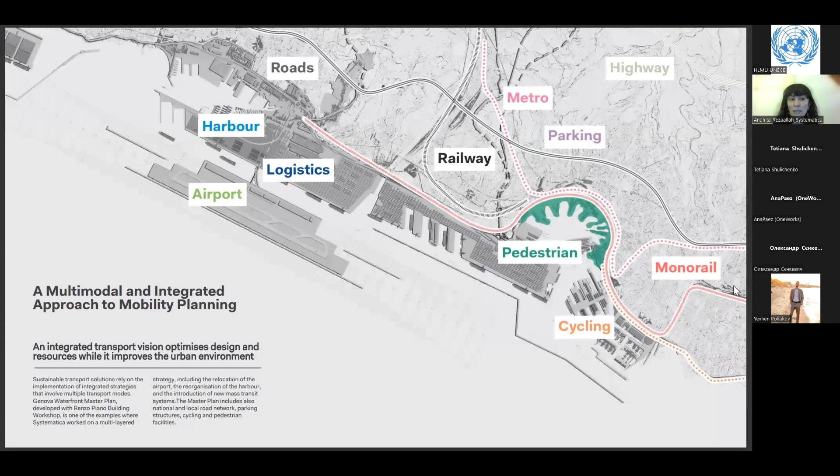So if this is the first time you're joining the meeting, we are Systematica, a transportation planning and mobility engineering studio based in Milan. We have over 35 years of experience working on projects of different scales, from national and regional to urban mobility plans, mixed use master plans, and complex buildings around the globe. Our strategies are always multimodal and integrated mobility approach.

In addition, we have a non-profit research foundation that works closely with us in most of our projects, and especially for the Mykolaiv Master Plan project, that it's called Transform Transport Foundation.

So jumping to the studies we've done, during the capacity building workshop that we did a couple of weeks ago, we showed a bit of opportunities and challenges that we believe the city of Mykolaiv is facing for different aspects of transport and mobility. Here, I would like to show again in detail studies that we have done, starting from the wide area analysis, going into understanding the city characteristics, morphology,

and mobility behaviors, the main mobility hubs of the city, followed by in-depth analysis of different aspects of mobility in the city of Mykolaiv. I will show briefly the methodology that we discussed in the other meeting with you for selecting 6 cities as benchmarking cities that we will look into, and the type of studies that we are planning to do, both qualitative and quantitative for these cities, followed by our first studies for port accessibility strategies that these cities are implementing to improve the vehicular traffic in the city and deviate the traffic from the city center, which we believe is one of the aspects that concerns the city of Mykolaiv as well.

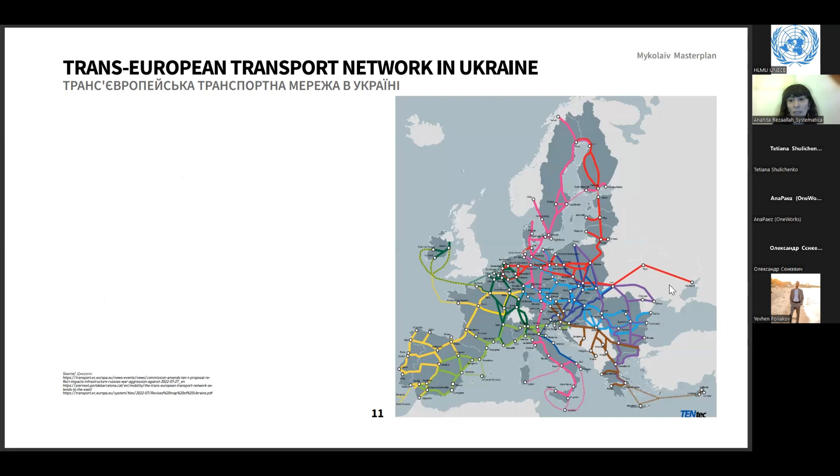So for the wide area analysis, we looked into very briefly policies and strategies that the EU is planning to implement regarding extension of European transport networks towards Ukraine and also the city of Mykolaiv. We looked into improvements in rail, road and water transport, and defining core and comprehensive port, airport and rail network of the country.

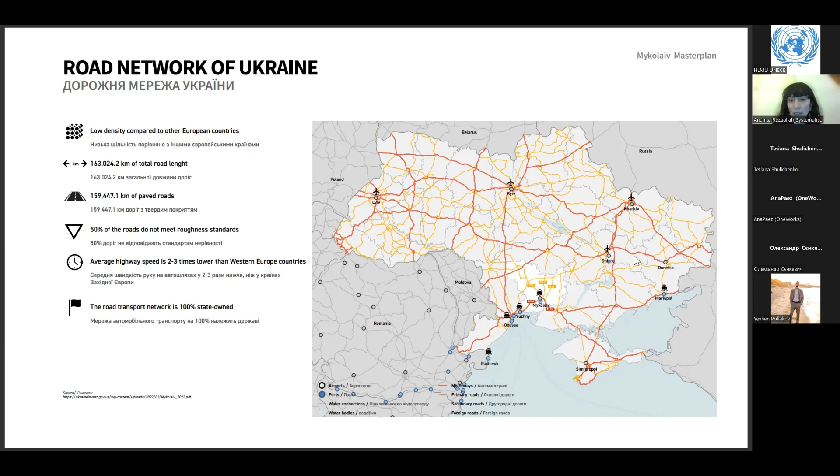Then we looked into the road network of Ukraine that is quite extensive. However, in terms of quality, 50% of the road doesn't meet the required standards, and the average highway speeds are 2 or 3 times lower than Western European countries. The city of Mykolaiv is well connected with the rest of the country through these extensive networks of highways and primary roads.

We looked into the national railway network of Ukraine. We know that Ukraine has one of the most extensive railway networks in Europe. It's 24,000 kilometers of rail, and 48% is electrified, and it serves 18 ports of the country, including the port of Mykolaiv.

We know that there are 13 commercial ports in Ukraine, 12 sea terminals, and 4 main seaports that Mykolaiv is one of them. They are handling 78% of the freight and cargo handling of the country. More than 85% of grains are handled in these 4 major ports, and more than 95% of metal products are as well handled through these ports, including the port of Mykolaiv. So the port is a quite important hub for the city and country's industry.

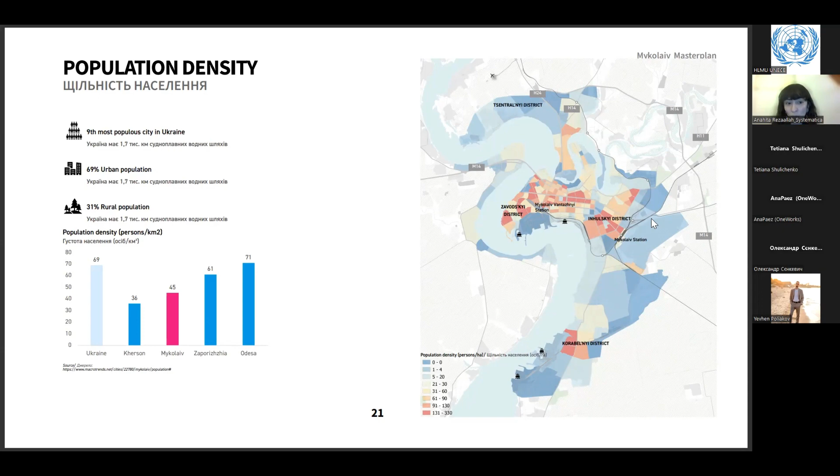Looking at the available socioeconomic data, we know that there are 11 universities in Mykolaiv, making it a quite important city for education and young people. We know that there are over 500,000 workforce available in the city of Mykolaiv, while the unemployment rate before the war was almost 11.5%.

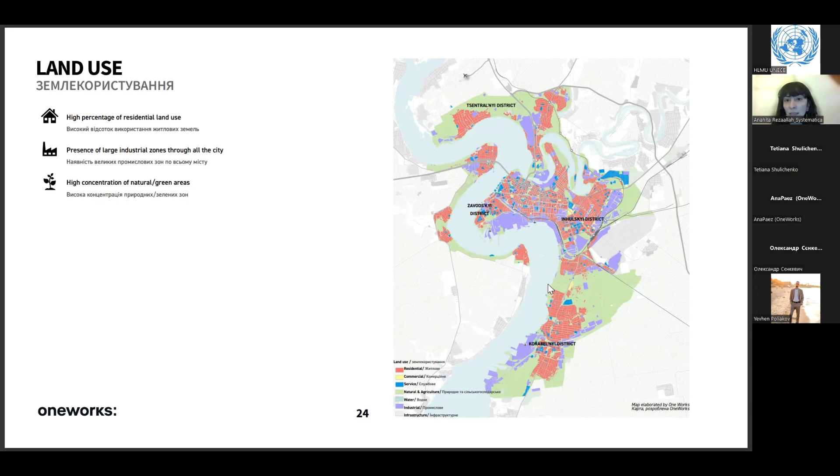We looked at the land uses of the city to understand that there is a high percentage of residential areas in the city, while the city, especially close to the river, has a heavy presence of industrial zones that limit access to the riverfront for the population. There is a high concentration of natural green areas that can be considered a potential for the city and citizens.

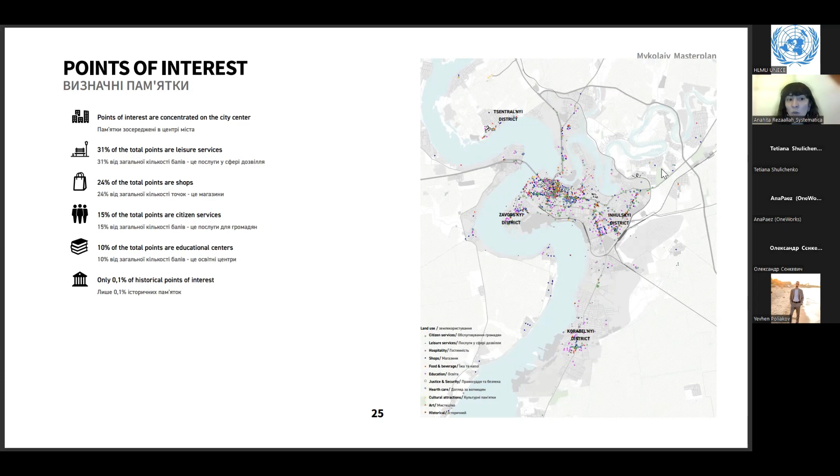We looked at the points of interest and their density within the city of Mykolaiv. We know that 31% of these points of interest are leisure services. They are mainly concentrated in the city center area, and moving out from the city towards the suburbs, they decrease in number drastically. There is a heavy presence of educational centers in the city, so 10% of the total points of interest are educational centers, and 0.1% are historical areas.

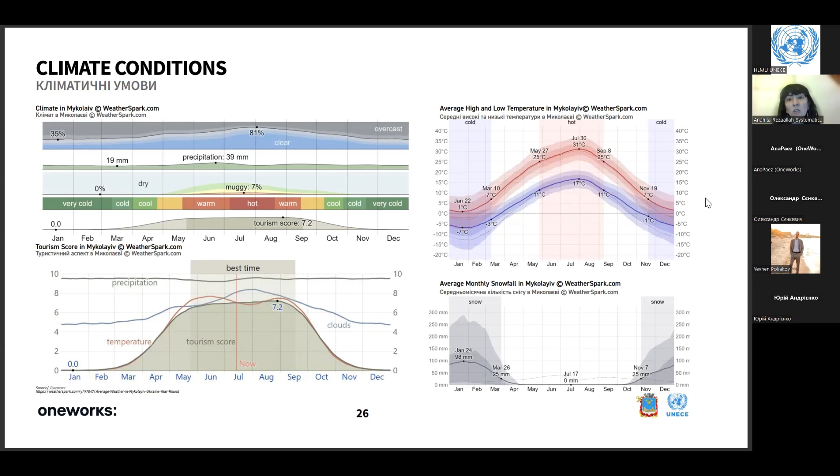We took a closer look at the climate conditions of the city to understand that during the winter months it gets quite cold, with the presence of snow. These are aspects we have to consider while defining strategies for pedestrians and cycling. For the rest of the seasons, especially during the summer, the temperature is quite agreeable for activities such as cycling and walking. We looked at the city elevation and slope maps to understand that most of the city center and areas where residents are located are quite flat and suitable for cycling.

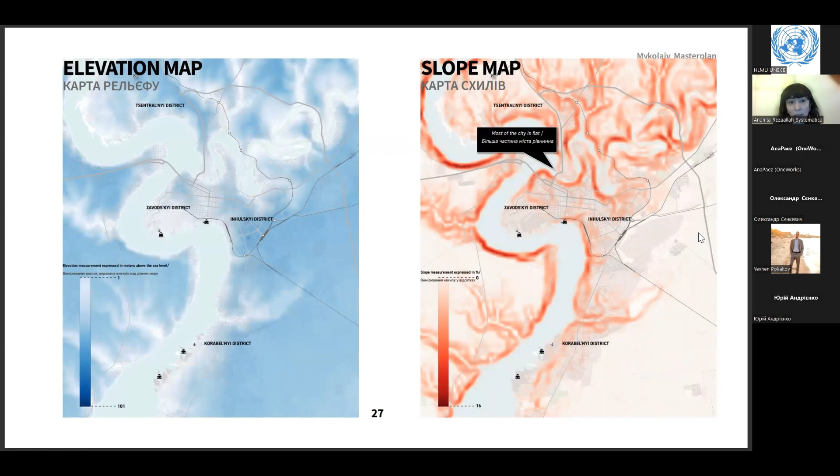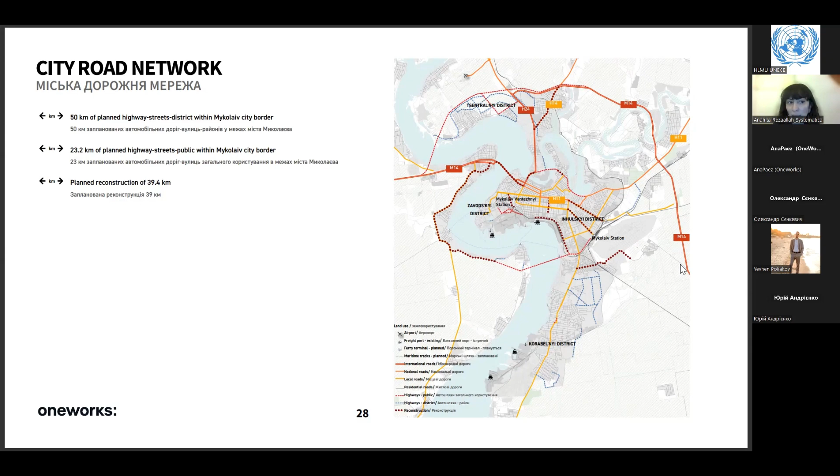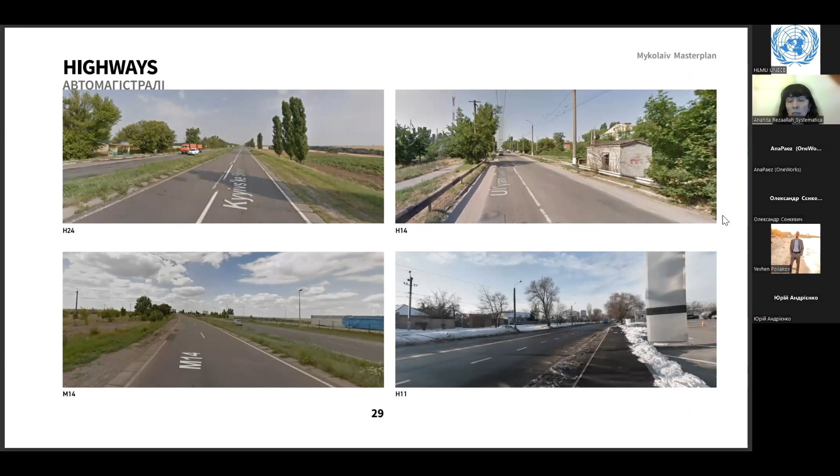We looked at the city road network and all the plans we could find from previous studies done by the municipality to extend this network, and in some cases propose new bridges to improve connectivity through the port area. I'm going to show you more in detail the studies we've done in this regard. So these are a few images of the conditions of the highway roads that connect Mykolaiv to the rest of Ukraine.

So we looked at the port of Mykolaiv and the facilities that it has. We know that the port area includes almost 70 hectares in area, and is located mainly in two areas close to the city center in the north and further south.

We know that the main roads and highways that connect the port to the rest of Ukraine for freight are passing through the city center, and this causes lots of concerns regarding congestion, air pollution, and traffic safety for citizens.

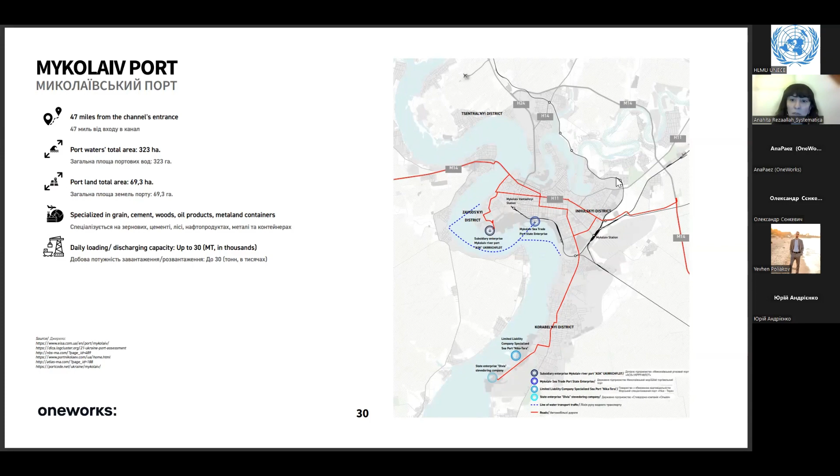So we studied more in detail access to the port area from different main locations in the city, from Kiev, to understand the roads that would be mainly used by trucks for connecting Kiev to the port of Mykolaiv, from Kherson and from Odessa.

So again, as I mentioned, we are fully aware of the issue of these main roads passing through the city center of Mykolaiv.

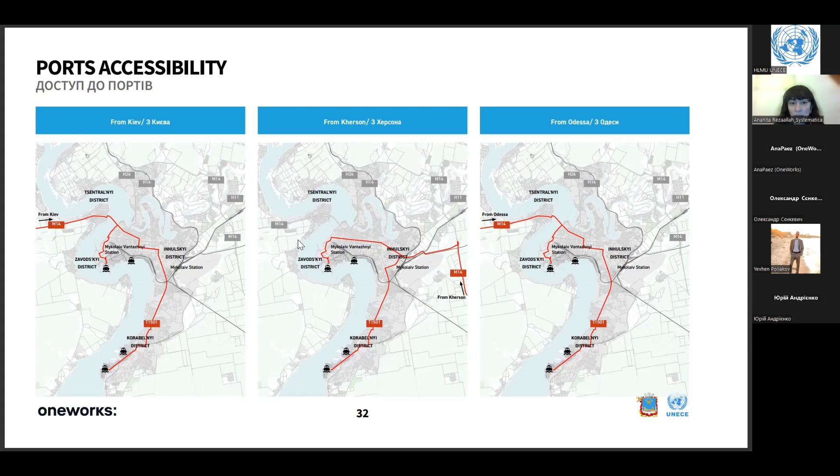We took a closer look at the Mykolaiv International Airport. We know that unfortunately the airport is currently damaged by the war. However, we know from previous statistics that the airport could handle up to 22,700 passengers per year. The airport is quite close to the city center.

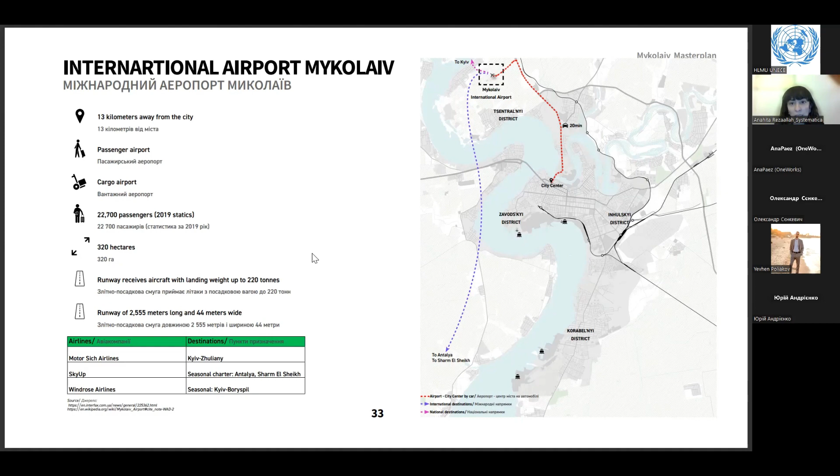So we took a closer look at the railway network of the city, which is quite extensive and reaches both port areas, located closer to the city center and towards the south, closer to the sea. And we know that the railway network handles both passenger and freight.

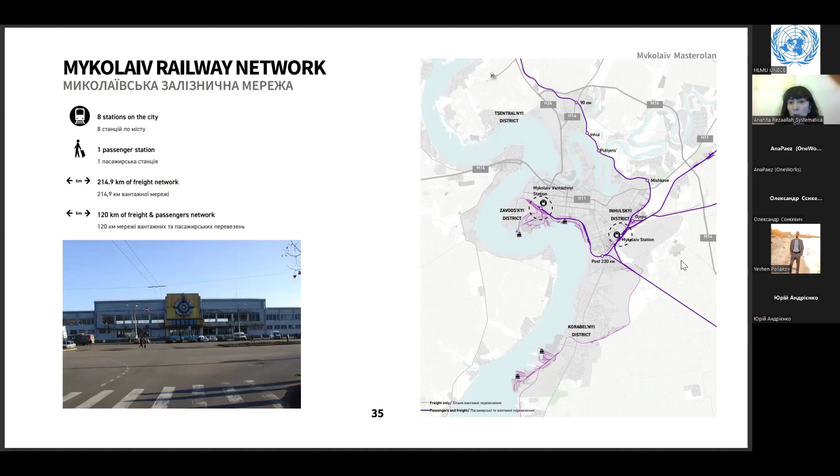There are several stops that we have identified. However, we know that some of these stations might be disused stations at the moment.

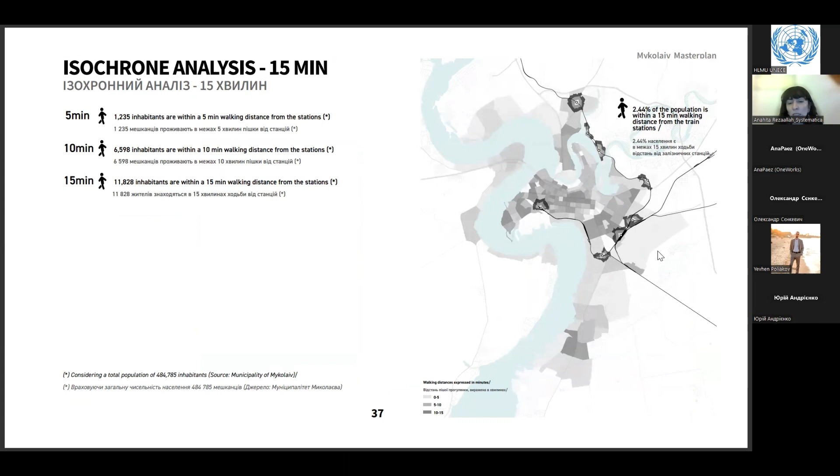Doing isochrone analysis for accessibility to these railway stations, we could understand that 2.5% of the population lives in the proximity, 15 minutes by walk, of the railway stations.

So from the Sustainable Urban Mobility Plan studies that was done previously by the municipality, we took a closer look at the mobility behaviors and patterns in the city of Mykolaiv, especially the modal share.

We know that public transport is used in 49% of the movements. However, walking is also another important component for mobility. In Mykolaiv, 40% of the modal share is dedicated to walking. Cycling is very limited due to lack of infrastructure.

And we are aware that part of this modal share dedicated to public transport is because of the marshrutka, as a sort of additional mode to the public transport.

We know that men are more likely to use cars and women are more likely to travel by foot. We know that women are uncomfortable using cycling due to the lack of infrastructure, similar to the trend that is available in the rest of the world.

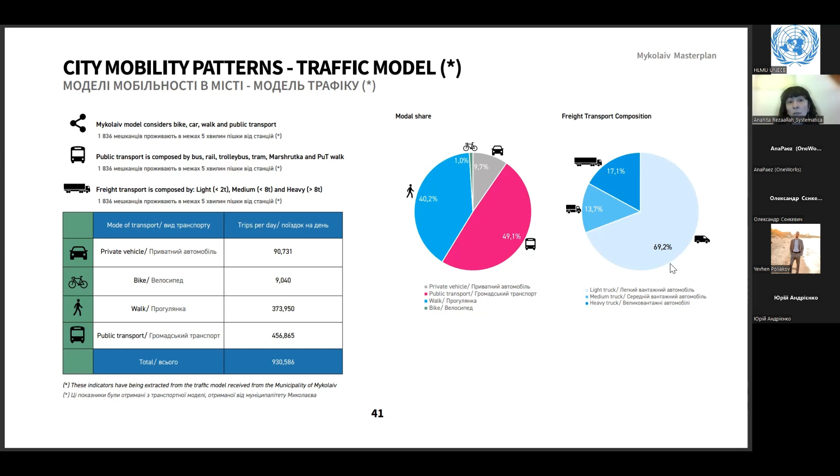So we know that heavy trucks are responsible for 17% of the freight traffic, medium trucks almost 14%, and lighter trucks are responsible for 70% of the freight traffic in the city.

So going back to the road network of the city, we know that at the moment there is no traffic limited zone or policies to regulate or limit the traffic within the city, especially for heavy vehicles.

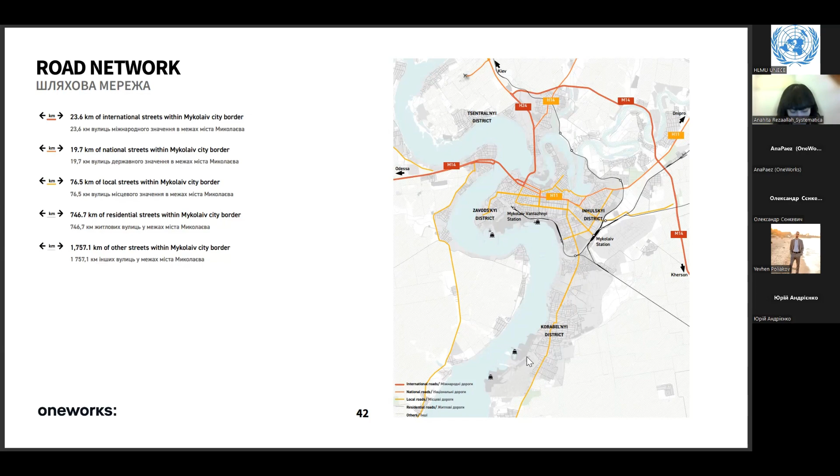We know that the main local roads, shown in yellow here, are the ones used by this heavy traffic, connecting the rest of the country to the port of Mykolaiv.

We tried to have a closer look at different typologies of roads to identify the pros and cons for each of them. I'm not going to go through everything, but I will just show a few examples.

In case of international roads, there is wide greenery available, and the ample space dedicated to vehicular lanes is an opportunity for reduction of lane space to dedicate to micromobility and cycling lanes. However, these wide lanes allow for high speed. Around these types of roads, there are no active ground floors to encourage walking or cycling, no cycling infrastructure available, no drop-off areas, and there is always a safety concern for pedestrians.

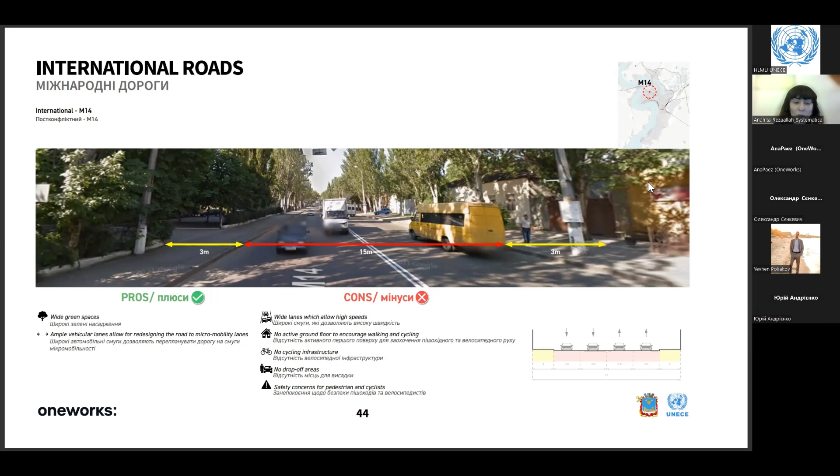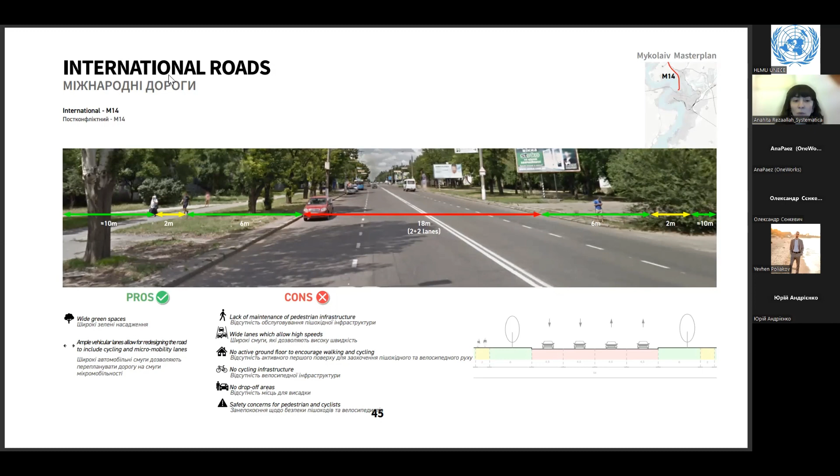This is another example, the M14 road that we looked into - the same pros and cons apply.

In case of national roads passing through the city center, most of the roads have greenery that can work as a buffer for safety for pedestrians and cyclists, and ensure climate comfort for walking and cycling.

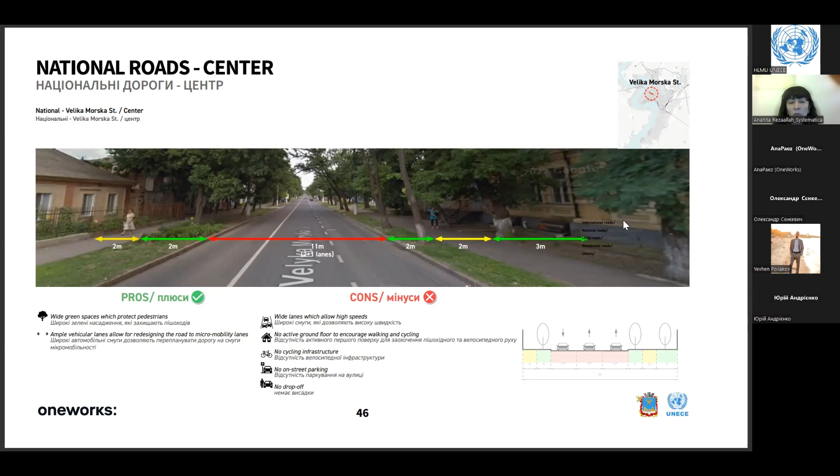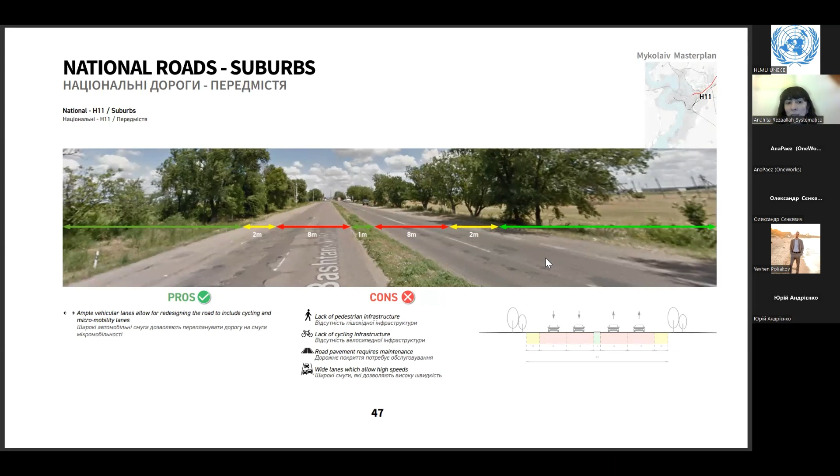However, these vehicular lanes are quite wide, allowing for high speed, with no active ground floor, no cycling infrastructure, no street parking, and no dedicated drop-off. All of this causes concerns for pedestrians and cyclists. In case of suburbs, there is no area dedicated to pedestrians or cyclists, and in some areas the road pavements require maintenance.

Going into local roads, there is the presence of a green buffer and availability of space, especially by deducting from the vehicular road to provide infrastructure for cyclists.

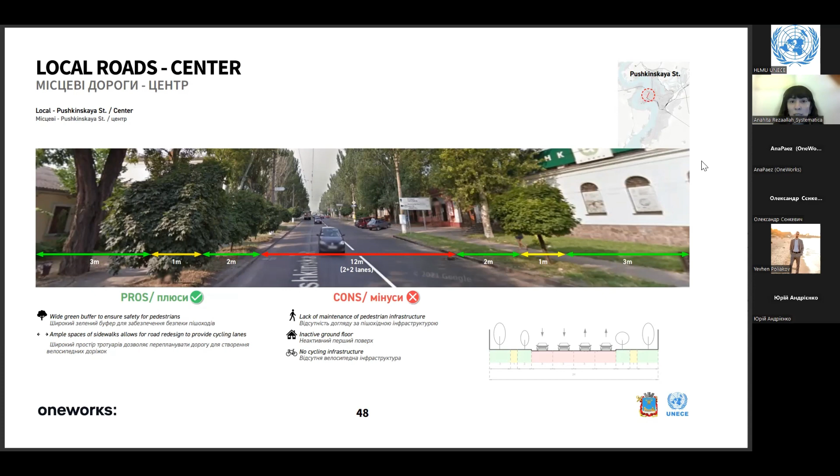In some places, the pedestrian infrastructure and sidewalks require maintenance. Again, there is a lack of active ground floor, which we believe would be a main component encouraging people to walk and cycle within the city.

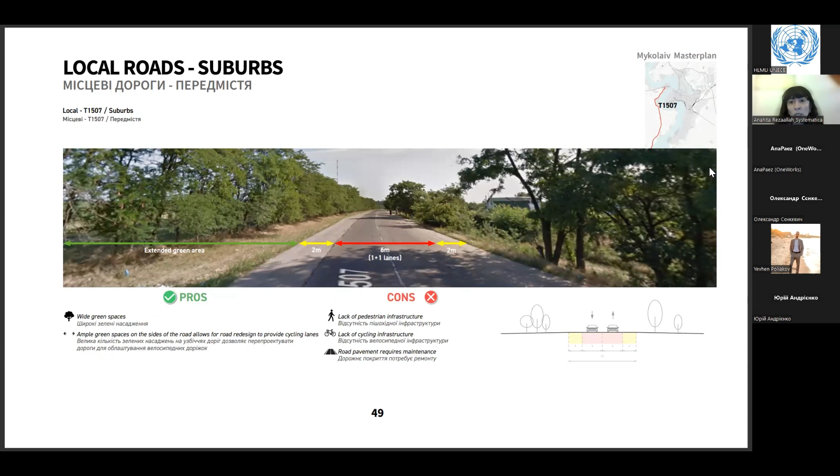Similar to the national roads, the local ones in the suburb area again lack any kind of infrastructure for pedestrians or cyclists, and there would be main safety issues for them.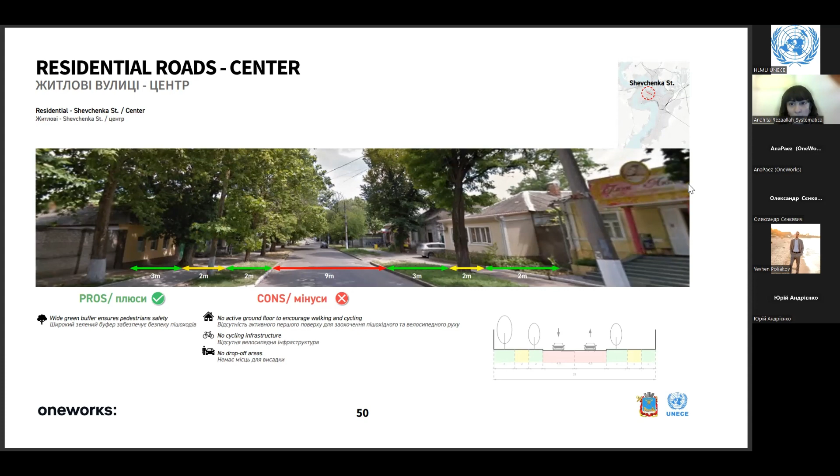Residential roads, again, there is no active ground floor, no cycling lanes, and no dedicated drop-off areas. However, we have the presence of greenery, safety buffers, and the possibility of adding cycling infrastructure to these road typologies around the city.

In the suburb, however, low traffic streets allow for shared spaces, but in some areas the lack of clearly defined pedestrian infrastructure might cause safety issues for pedestrians. The road might require maintenance in some areas of the city, and there's always the lack of active ground floor.

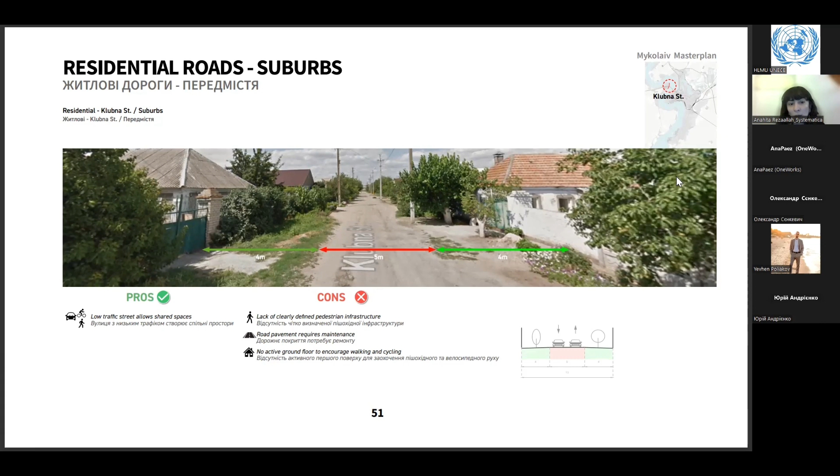Then we took a closer look at the Central Avenue, as we believe it's one of the main streets within the city center that has traffic safety concerns, with a lot of heavy vehicle traffic passing through to connect to the port.

There are no speed limits, so there are concerns for safety. There are no dedicated drop-off areas for pedestrians or cyclists, no cycling infrastructure, and no active ground floor to encourage walking and cycling.

However, there is a wide green space in the central area that allows for road redesign to provide dedicated lanes for cycling and micromobility. In general, the central location of the Central Avenue in the city makes it a suitable area to provide active ground floor in the future.

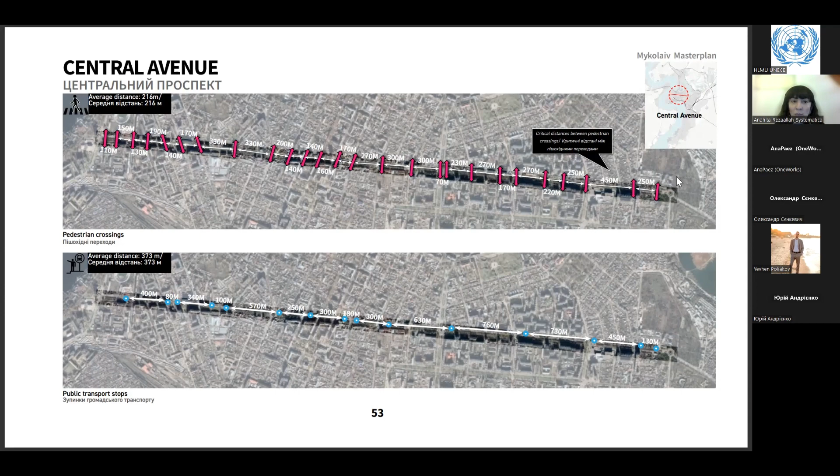We took a closer look at how frequently there are crossing points or junctions and public transport stops. Every 216 meters there is a crossing point, and the average distance for public transport stops is 370 meters. Both make this road a suitable area for walking and cycling and active ground floor activities. However, the concerns regarding heavy vehicle traffic and no speed limits should be taken into account.

So very quickly, there are several challenges for the road network: lack of bypass to divert traffic from the city center, especially heavy traffic; bridges in unsatisfactory conditions; a high number of traffic accidents; excessive width of lanes allowing for high speed; no traffic limited zones or speed limits within the city; and a lack of cycling infrastructure and active ground floor to encourage the shift towards more sustainable modes of transport.

The opportunity is that the city is not car oriented, with only 15% of the modal share for private car. The city has a strategic location in the road network of southern Ukraine, and there are bridges planned to connect the city to these highways and divert heavy vehicle traffic from the city center.

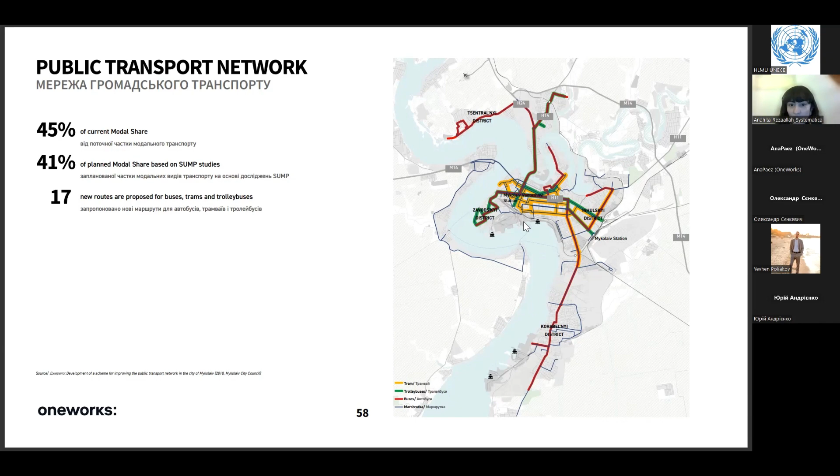However, looking closely at the network density, we can identify areas within the city, marked by number 1, that are underserved by public transport. There are industrial areas that, even though there is a heavy presence of employees, are still very underserved, with basically no public transport access provided.

On the west side of the city, far from the center, the marshrutka is the only available mode of public transport. The central part has the most overlap of modes and routes of public transport, while in suburban areas this decreases drastically.

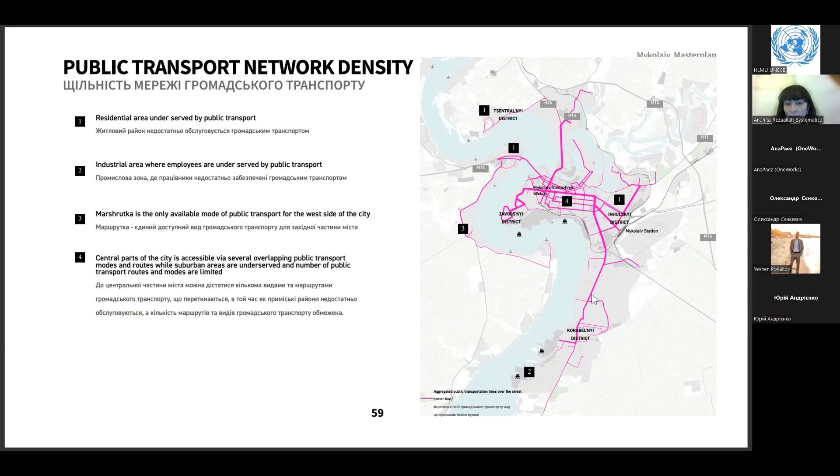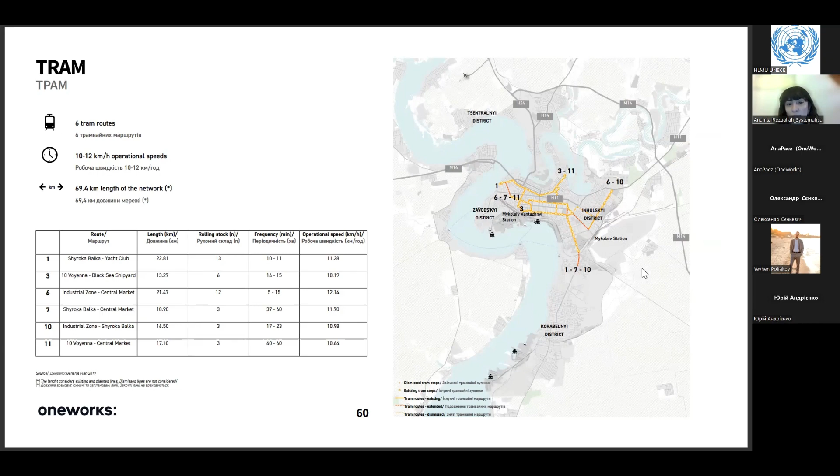We took a closer look at different modes of transport. Looking at the tram, we know there are 6 routes available, the operational speed is low, and the tram is mainly concentrated in the city center. This low operation speed and frequency decreases tram use by citizens.

Looking at the tram infrastructure, the condition of the rolling stock and infrastructure needs improvement. The stops lack travel information that would encourage use of the tram, such as timelines, timetables, maps, and similar details.

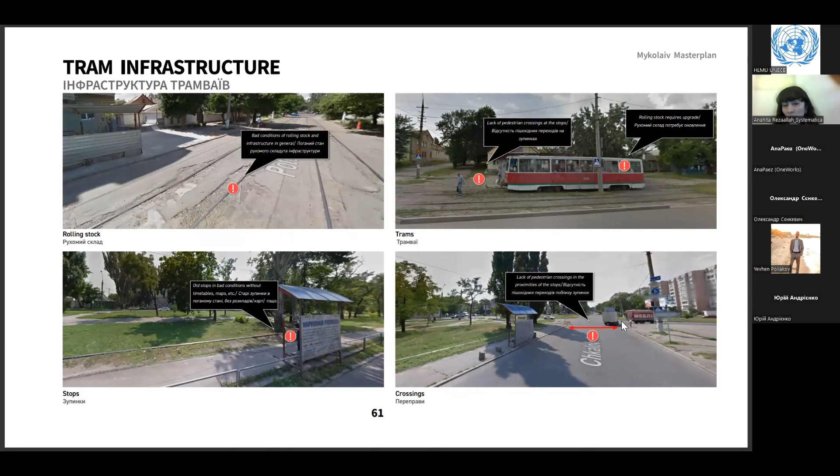There is also a lack of pedestrian crossings at tram stops in several locations, causing safety concerns for pedestrians, as you can see in these 2 images.

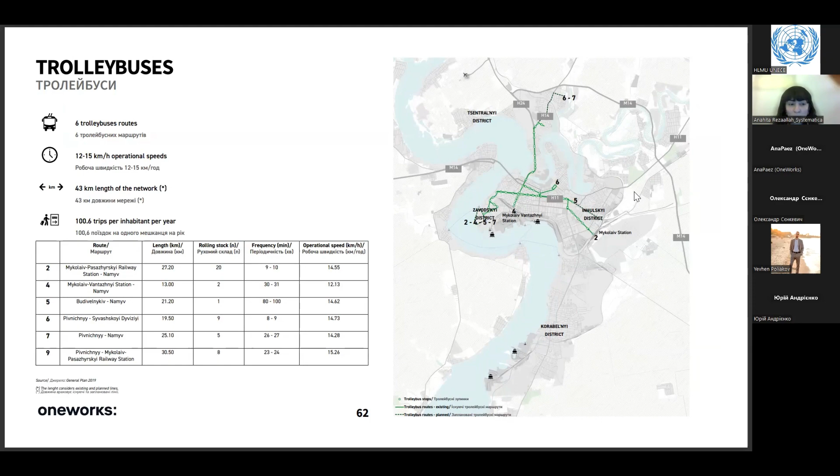Then we look at the trolley buses. Similar to the tram, the trolley bus mainly connects the central part of the city, and toward the south and west there are no lines or routes available.

Looking at the infrastructure, some stops don't have shelter, maps, or timetables, and the ones that do have shelter still lack maps and timetables that would encourage and facilitate use for citizens.

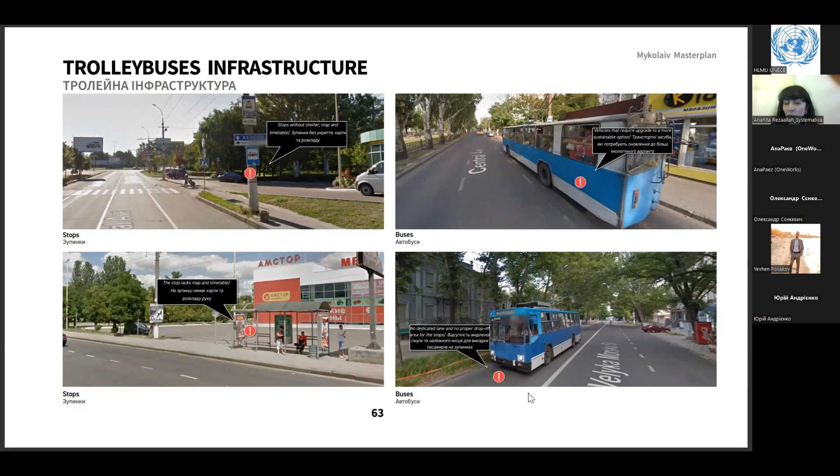We know vehicles need to be upgraded and the rolling stock is lacking. There are no dedicated lanes and no proper drop-off areas for the stops in most of the routes.

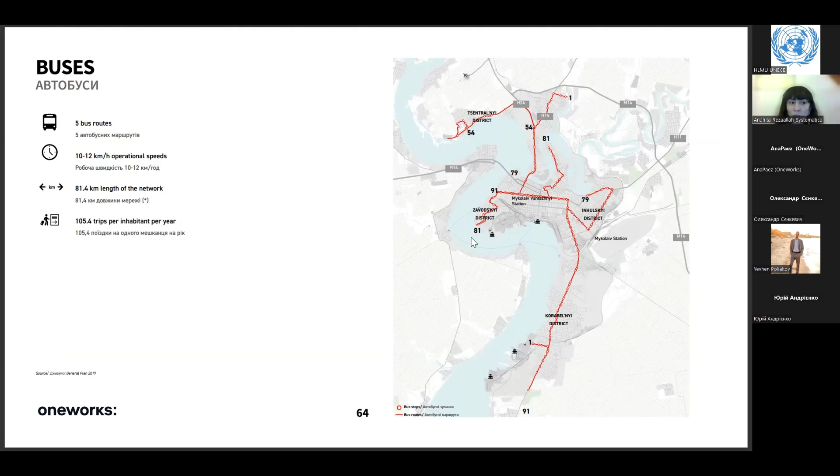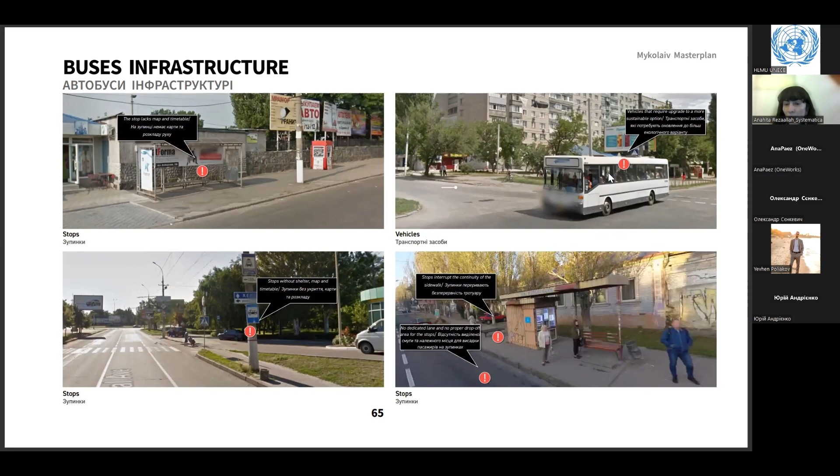Buses are more extensive and reach the southern area that the tram and trolley buses don't serve. Similar to the trolley bus, bus stops lack travel information, and there are no dedicated lanes to improve frequency and speed, or increase reliability of service. The vehicles require upgrade, perhaps to more sustainable options.

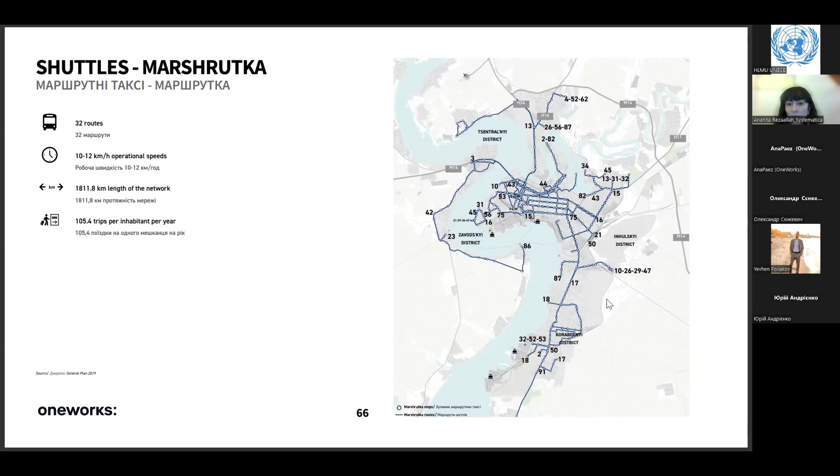For the marshrutka routes, they are much more extensive compared to other modes, with 32 different routes connecting different neighborhoods of the city. The infrastructure and rolling stock need upgrade; in some areas, especially suburbs, stops have no shelter, sign, or timetable. The vehicles, similar to other modes, require upgrade to more sustainable options.

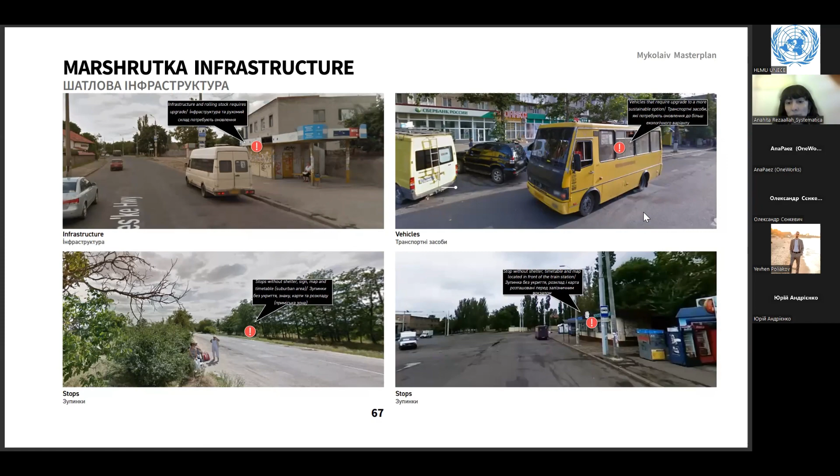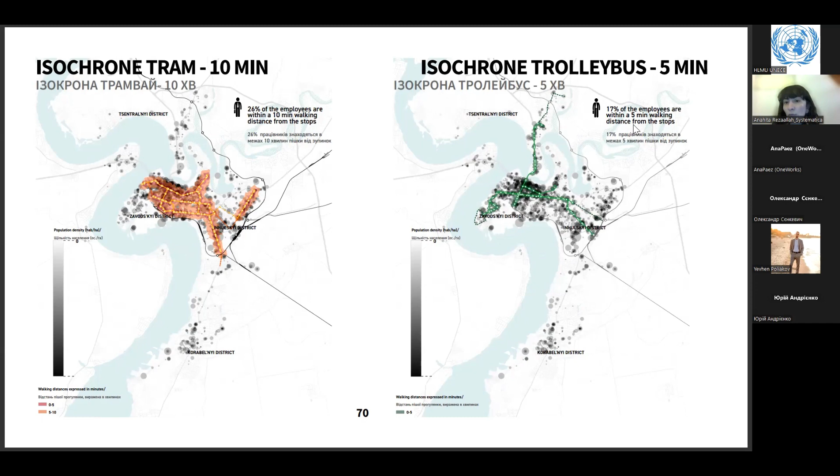We carried out the same isochrone analysis for the employees and understood that 26% are located within 10 minutes walking of tram stops, 17% within 5 minutes of trolley bus stops, 33% within 5 minutes of bus stops, and 62% within 5 minutes of Marshrutka stops. However, 30% of employees have no access to public transport because some areas of the port are not served by public transport, or stops are too far from them.

The challenges for public transport include limited coverage of tram and trolley buses, few connections between districts, significant overlap of routes that duplicate each other, especially for bus and Marshrutka, no dedicated lanes which negatively affects service efficiency and reliability, poor condition of infrastructure, rolling stock and vehicles, low speeds for trolley bus and tram, and low frequency in general. Public transport is also not adapted to groups with reduced mobility.

There is also a lack of an integrated ticketing system to encourage multimodality and use of several options at the same time. The main opportunities are that the share of public transport is quite high in the city's modal share, and the proposed optimized network with electric solutions is among the opportunities for future plans.

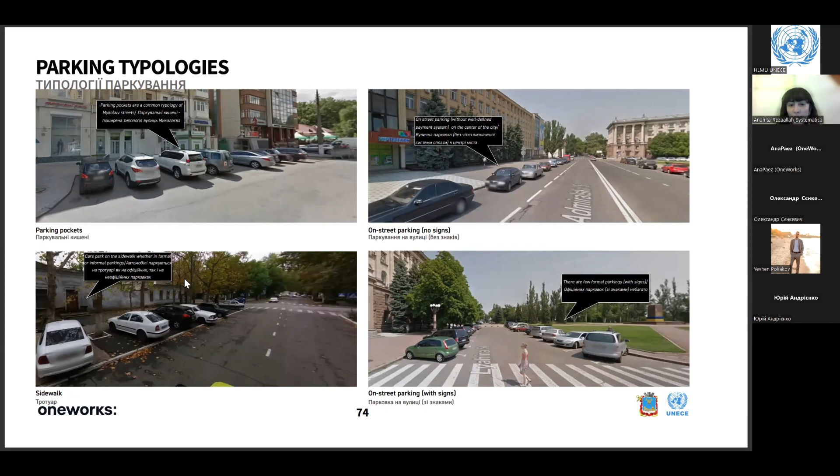Looking at the parking typologies of the city, currently everything is on-street parking as the common typology, with dedicated areas in some places defined by signs and lanes, and none in others. There is no paid parking, no formal parking, and parking is quite chaotic. Sometimes this pocket parking interrupts the continuity of sidewalks.

However, based on future policies the city is planning to implement, we know the city plans to create a parking management system that would establish paid parking zones, especially in the city center.

Again, the challenges are no paid parking, irregular parking, and chaotic, informal parking that decreases the quality of the public realm. The opportunities are planning and implementing a parking system, defining paid zones especially in the city center, to encourage a shift towards more sustainable use and decrease vehicular traffic within the city center.

There is a possibility of proposing a park and ride system close to mobility hubs and nodes to sustain and encourage the modal shift from car to public transport.

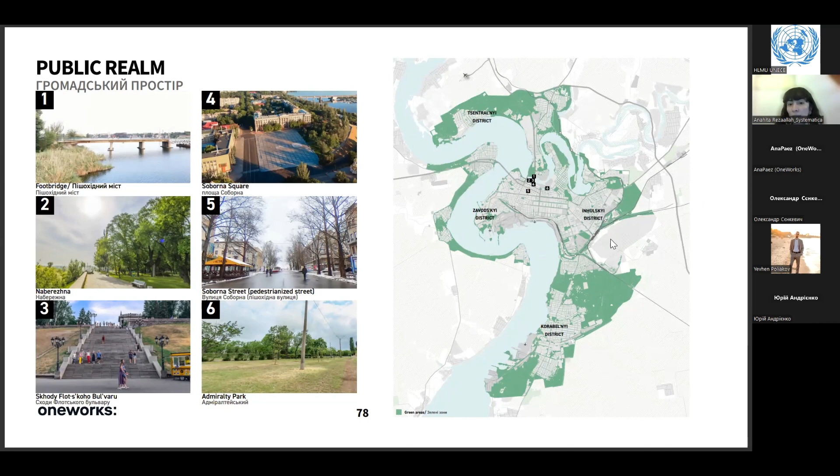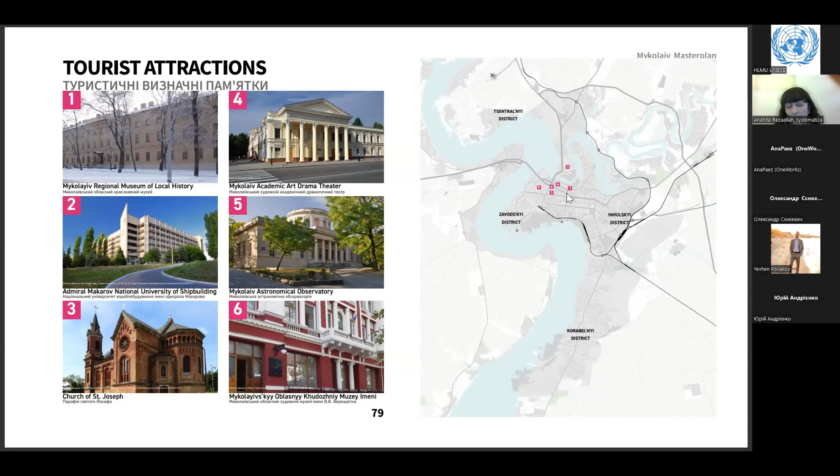We took a closer look at the public realm of Mykolaiv and current available infrastructure, including pedestrianized streets and all the important squares, bridges, and parks the city has. We also looked at tourist attractions, mainly located within the city center, and the universities and education centers as well.

Looking closely at the pedestrian infrastructure, as mentioned before, there is a lack of active ground floor uses. The lack of pedestrian crossings in some areas causes safety concerns, and in some areas sidewalks are narrow or require maintenance.

However, we know that Soborna Street is a wide pedestrian street in the city center with commercial activities on the ground floor.

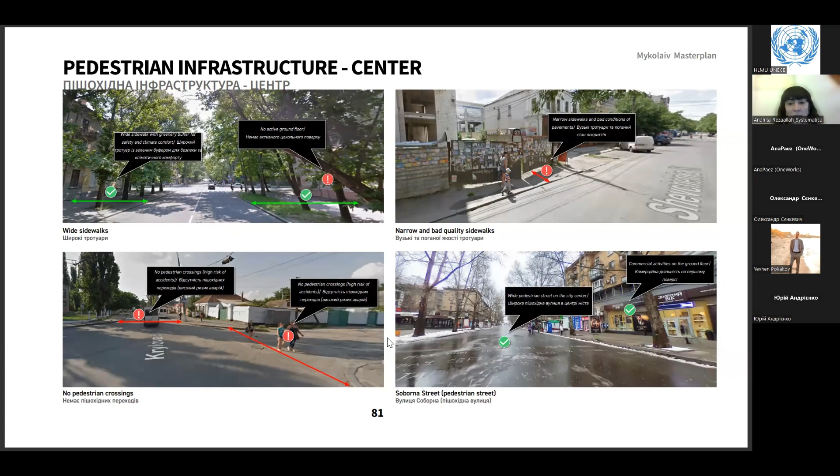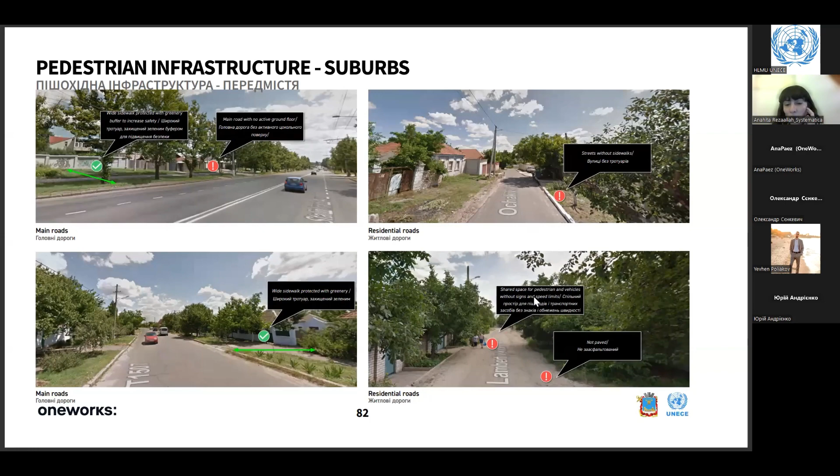Looking at the main road, close to it there is a lack of sidewalks and a lack of active ground floor. However, sidewalks are protected by a green buffer in most areas. In the suburban areas, though, there are some concerns due to a lack of clear definition between sidewalks and roads.

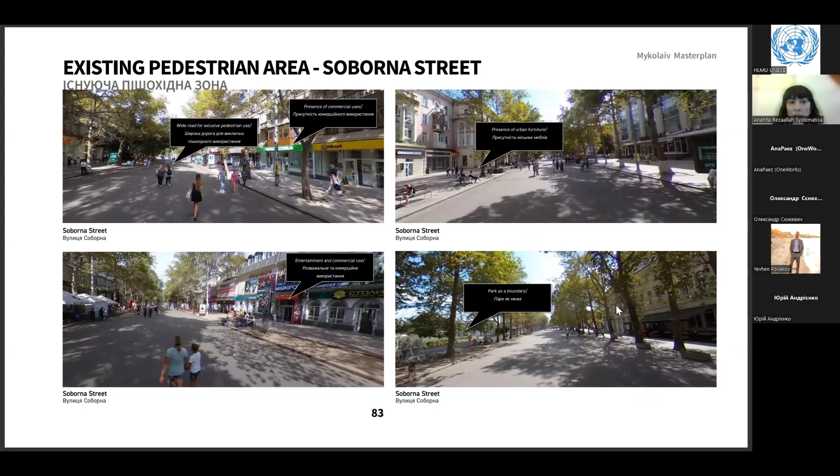This is a closer look at Soborna Street, with commercial activities, presence of urban furniture, and greenery, which makes it an ideal location within the city center for walking and cycling.

Challenges include lack of maintenance and low quality of pedestrian infrastructure, including intersections and sidewalks. There are some shared spaces with vehicular traffic and pedestrians within the suburb area without speed limit signs or traffic signs. Sometimes sidewalks are interrupted by building entrances, and there are frequent road accidents on the crossing points.

We know that walking is a second mode of transport in Mykolaiv, and the city intends to implement road safety measures to increase pedestrian safety. We know there is a presence of a consolidated network of residential and local roads that can offer great potential for introducing a soft mobility network.

And active frontage, and implement the proximity city vision. In general, the public spaces in Mykolaiv are flexible and adaptable. We took a closer look at what was planned in the past. We are aware that these plans are not approved for cycling, and we know that several recreational lanes along the riverfront are proposed as well.

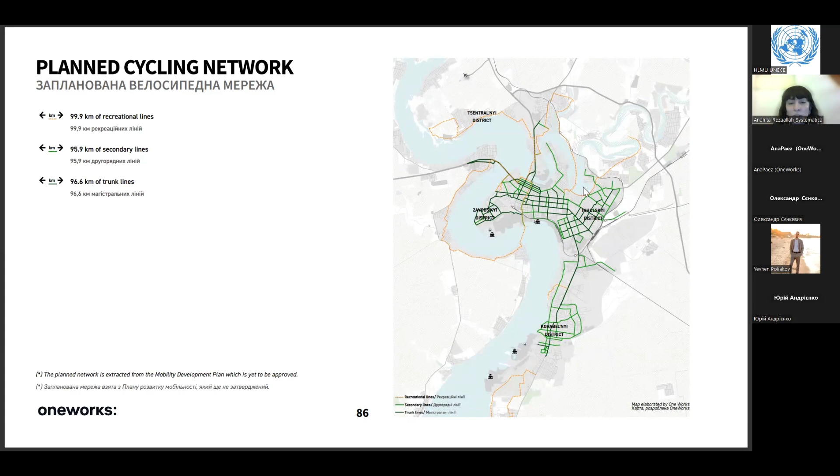Currently, we know that there are very few cyclists that move with vehicles in the same lanes. However, it causes concerns, and we know that there is no bike sharing system or infrastructure available at the moment in the city.

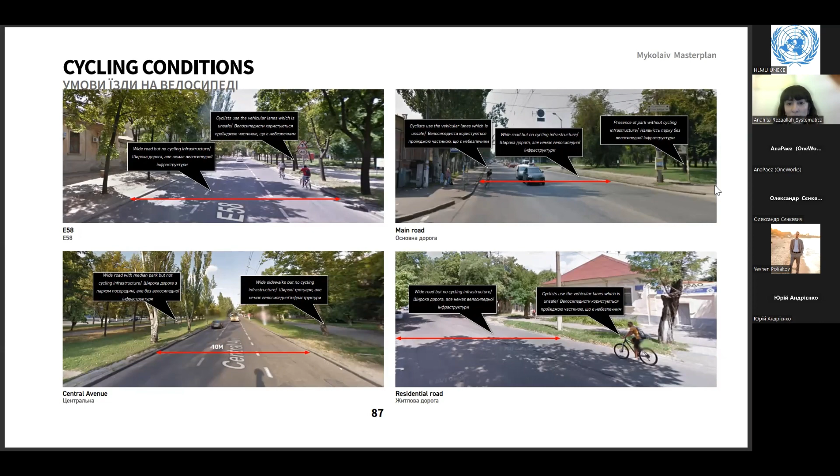So the opportunities for cycling can be, first of all, all the lanes planned by the city, and the estimations that cycling can increase from 1% of the modal share to 11%. There is the possibility to arrange for bike parkings, especially near points of interest, including university, education centers, commercial centers, and offices.

The wide road infrastructure allows for implementation of cycling lanes in the future, and providing sharing schemes can really increase the use of bicycles in the city.

The bike network can be integrated with the public transport hubs, and a bike and ride system can be proposed. There are possibilities to ensure safety strategies, especially with the availability of extensive green buffer within the city.

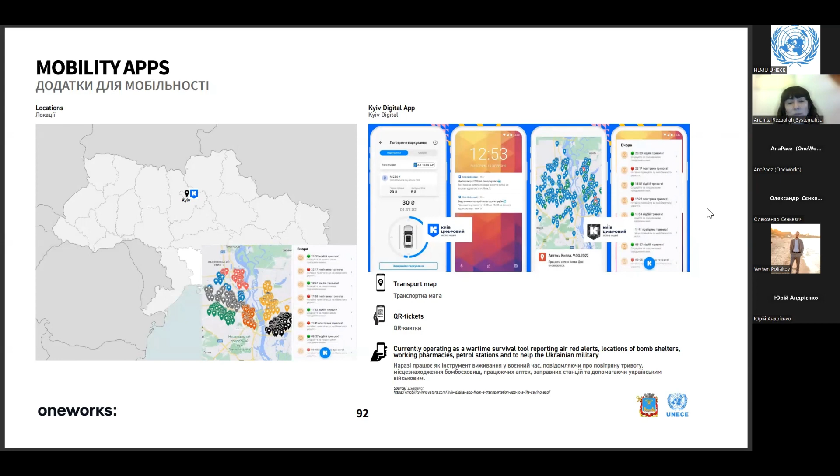As I mentioned, cycling can be an effective mode of transport, and there are NGOs and nonprofit associations that try to source and send bikes to people in different Ukrainian cities. We are not aware if they provide any for citizens of Mykolaiv.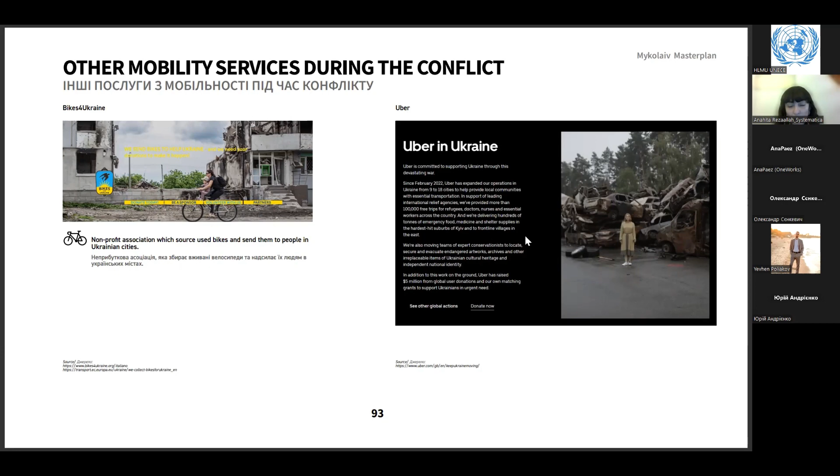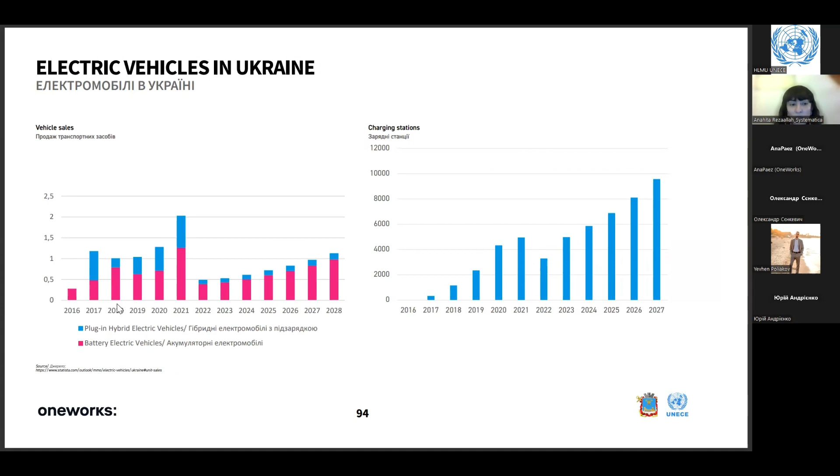As we can see, the number of charging stations in the country is increasing, as well as the share and sale of electric vehicles, similar to trends in other parts of the world.

We know that there are 32 charging stations in the city, 18 EV parkings, some of them including valet parking, and there are 19 public charging stations. So there are several options available within the city of Mykolaiv.

For urban logistics, we know that there are different options available with automated parcel lockers in different areas of the city, especially in the city center, and pickup points and consolidation centers in the city center that are part of the solutions that would really reduce the presence of heavy vehicles and delivery trucks, and improve the overall congestion and traffic issues of the city.

So that was the first part of the analysis, done mainly to understand the current situation in terms of transport and mobility of the city.

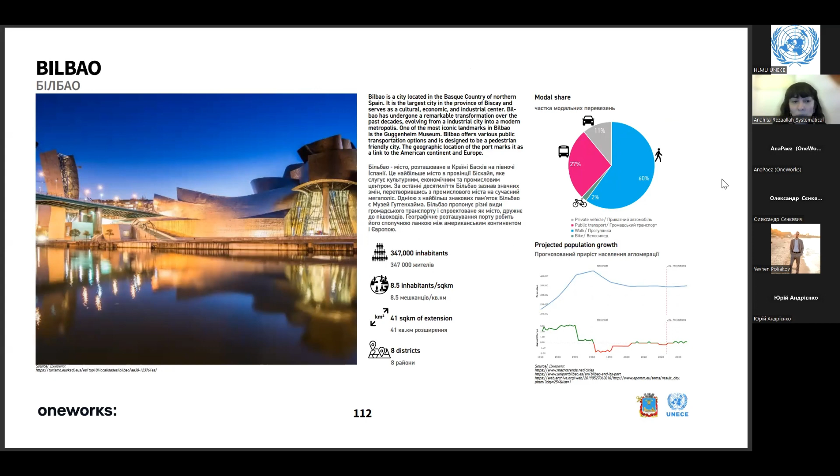We took Bilbao as one of the cities that has remarkably transformed from an industrial city to an important cultural city of the world, especially due to the presence of the Guggenheim Museum. Bilbao port has implemented different strategies that can be interesting for Mykolaiv as well.

We know that they are trying to invest more and increase the capacity of the rail connection to the port to decrease road traffic. This applies to the intermodal corridor that connects Bilbao and Europe to the UK, which includes rail and water rather than relying on road traffic access for moving freight.

They have an innovation research center hub within the port to work on issues such as logistic efficiency in operations and delivery, digitalization and smart platforms for the port, providing environmental and energy sustainable solutions, and increasing the security of the port.

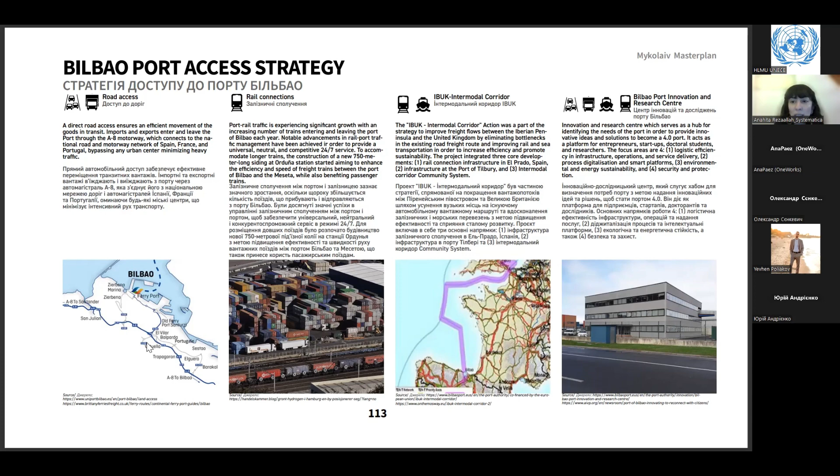Another important city we're going to study in more detail is Bordeaux. The city center is recognized as a UNESCO World Heritage Site, and the city is famous for its investments in urban regeneration projects and developing sustainable initiatives.

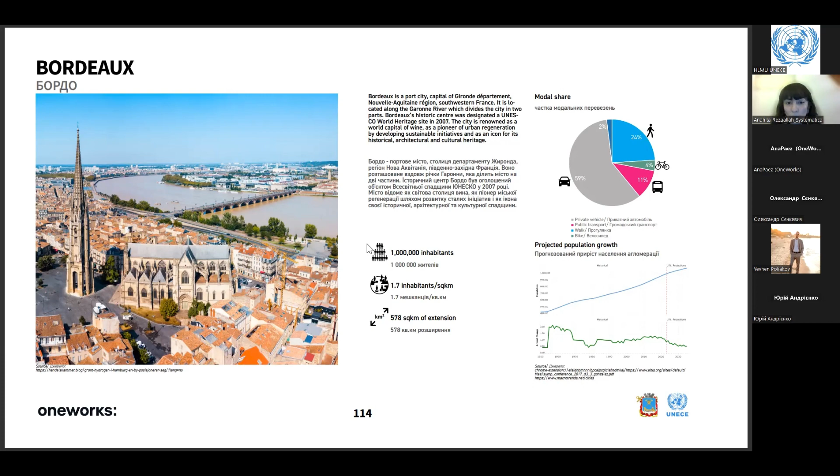The port has a diversified network of multimodal transport options by land and sea. There is a high-speed rail connection that connects the port to Paris, and major highways connecting the port to the rest of the country.

There are innovation projects implemented in the port to improve its energy transition, and the city applies different traffic limited zone criteria to the ring roads as well as the city center, to ensure heavy traffic is diverted away from the port area.

Hamburg is the largest port in Germany and one of Europe's most important transport hubs. The city has a very well balanced multimodal access for transport, including public transport, cycling, and walking, ensuring the reduction of private transport use within the city.

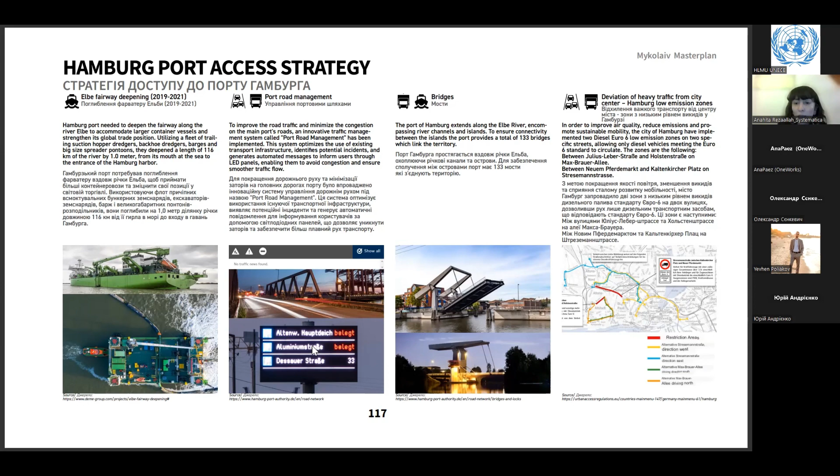Similar to Bordeaux, there are several strategies to define low emission zones within the city center and traffic limited zones that limit the access of heavy trucks and vehicles to the port and city center area.

Rotterdam is also the second largest port city in the Netherlands, among one of the busiest and largest ports in the world. Similar to other Dutch cities, there is a high percentage of cycling infrastructure, pedestrian-friendly infrastructure, and water transport options that encourage combined mobility and discourage vehicular traffic within the city.

For the port area, a very important component for the Port of Rotterdam is the presence of the rail freight system, which ensures access to the port and between different port terminals that are quite elongated across the city.

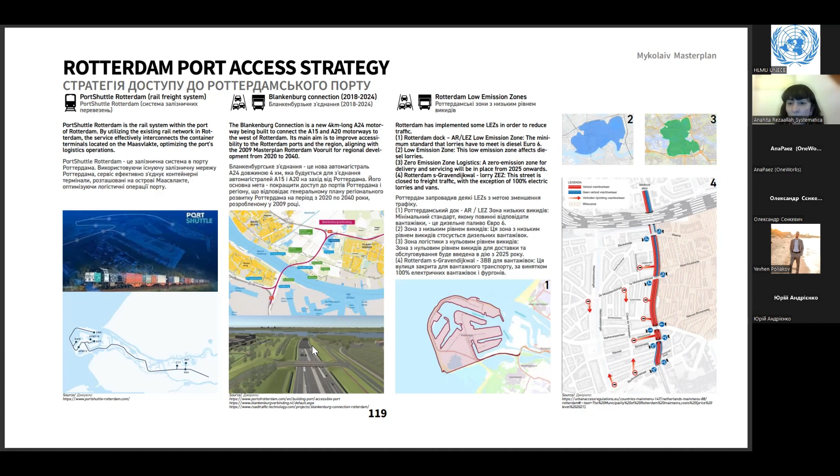There is a new bridge and bypass plan, and several low emission and zero emission areas planned within the city and streets that limit the access of trucks.

Tallinn is the capital and largest city of Estonia, and it's considered a UNESCO World Heritage Site. The city is working on promoting public transport, cycling, and sustainable transport, trying to decrease the use of vehicular traffic.

The port of Tallinn has an automated traffic management system that fastens access to the old city harbor, located close to the city center. They are investing heavily in improving the rail connection to the port, trying to replace vehicular traffic with rail traffic.

Similar to other cities, there are several areas within the city center that are traffic limited zones, and they have limited access for trucks.

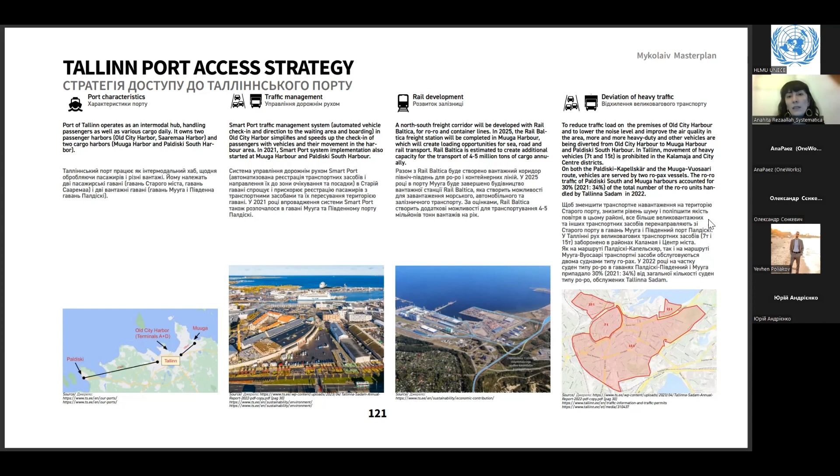So very quickly, we're going to look into how ports in different cities are accessed and how traffic is diverted from the city center.

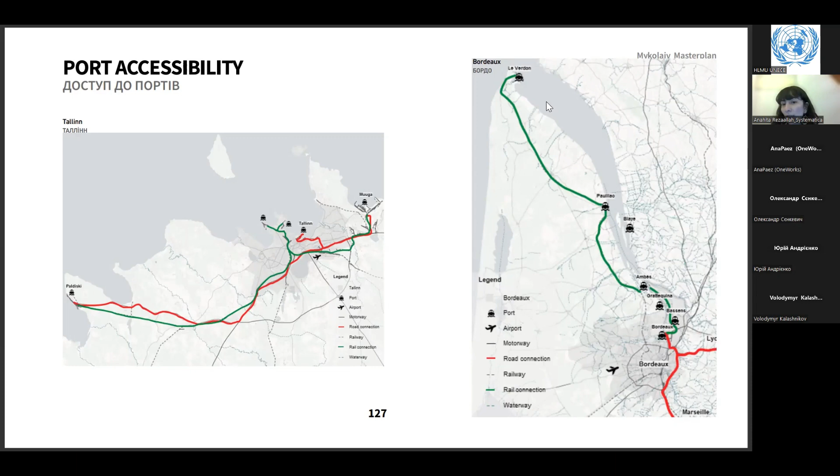In the case of Bordeaux, again, the highways avoid the city center and provide access to the port through ring roads, and the extensive rail network ensures connection between the different port terminals.

So all of these are different strategies that can be considered and applied in Mykolaiv when we look more into detail into strategies and solutions.

And that's it. That's the end of our presentation. Thank you very much for your time. I'm available if you have any questions or remarks.